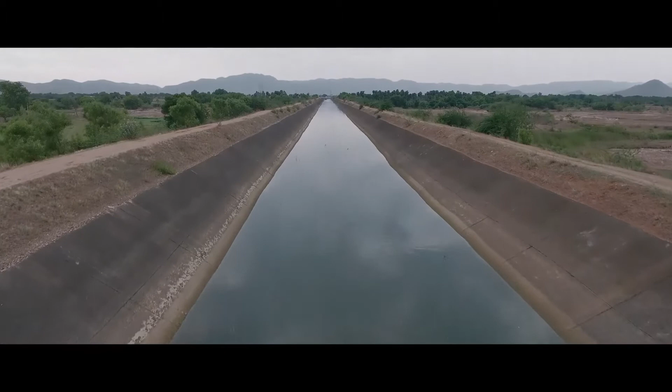The primary source of water supply for Tirupati Municipal Corporation has been Satyasai Ganga Canal, a non-perennial source which is about 43 kilometers from the foothills of Tirumala. The process through which Tirupati Municipal Corporation caters water for its people can be simplified into three parts.

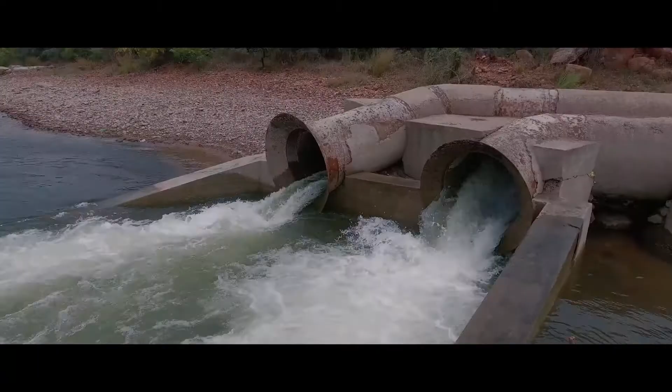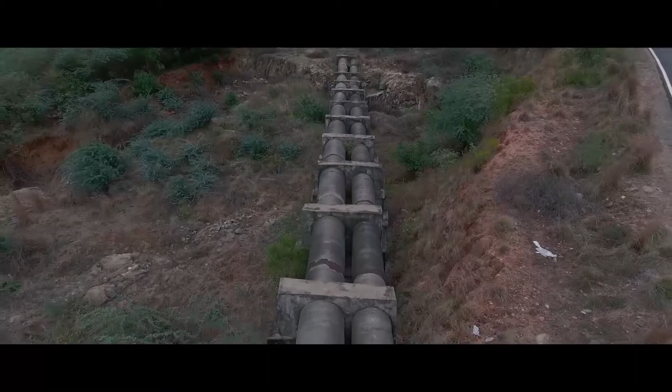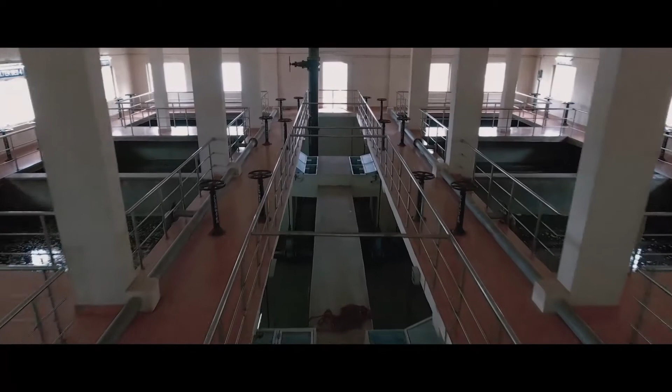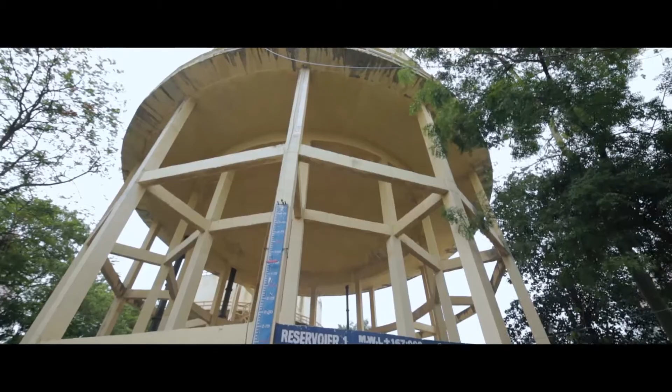Water from this canal is lifted and stored in Kailasagiri Reservoir about 2 kilometers away from Satyasai Ganga Canal, and then through a series of pumping and gravity mains, water is brought to Mangalam Water Treatment Plant, located near the foothills of Tirumala, and then bulk distribution of treated water to ground level and elevated service reservoirs within Tirupati Municipal Corporation limits, and then delivery of water from ground and elevated service reservoirs to individual consumers.

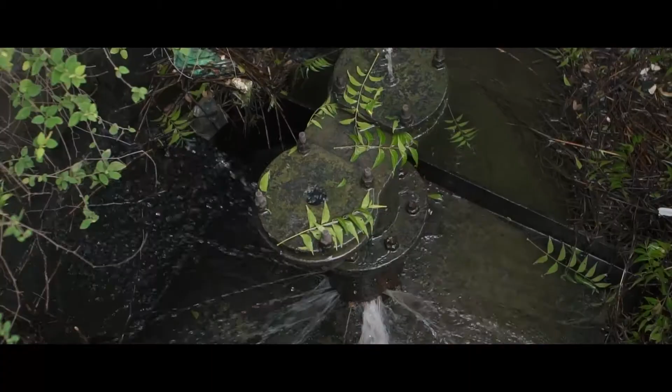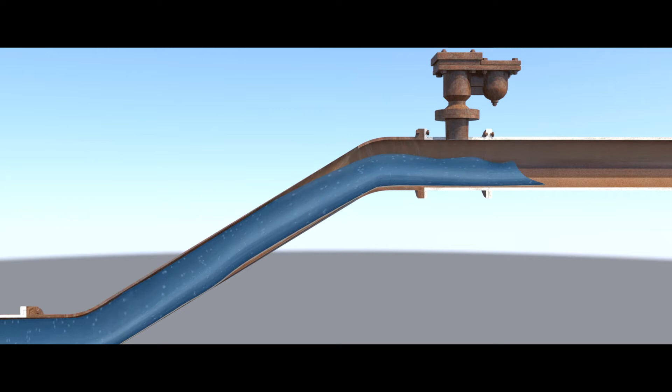This loss of capacity is affecting the drinking water needs of both Tirupati residents and also the pilgrims of Tirumala Tirupati Devasthanams. The loss of capacity in the supply of drinking water is due to many problems in the existing system and its operation. The main problems pertaining with the existing system are weakening and carrying capacity of the pipelines, frequent filling and draining of pipelines because of the disruption in service further weakens the pipelines. Moreover, accumulation of air along the pipeline reduces the pipeline carrying capacity. Loss of capacity results in increased energy costs.

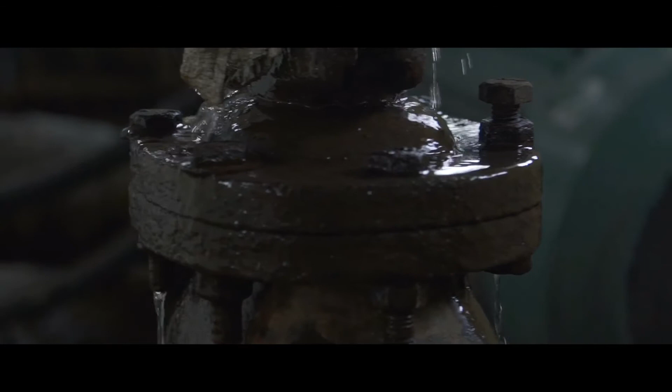Damaged check valves. Check valve may get damaged over a period of time. Once check valves stop functioning, there will be a heavy backflow through the pumps, resulting in vibration of pumps and loosening of seals and eventual leakage of water within the pump station. The damage can be huge if the operators do not react within a minute of power failure and close the valves.

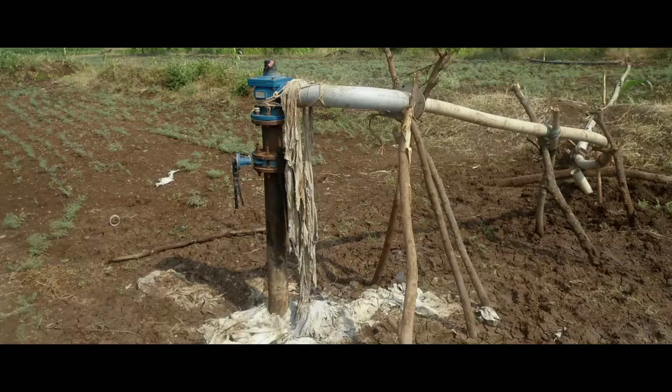Exposed air valves. The conventional air valves are exposed to people who tamper them and steal water. In this process, these valves become non-functional, which will have a negative impact on the hydraulics of the scheme. And there are problems that arise in a specific stage of water supply process.

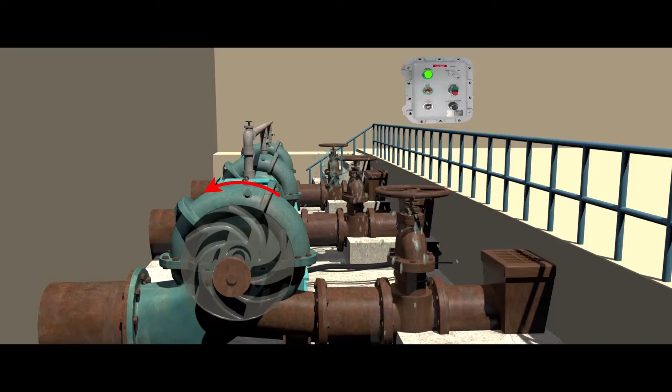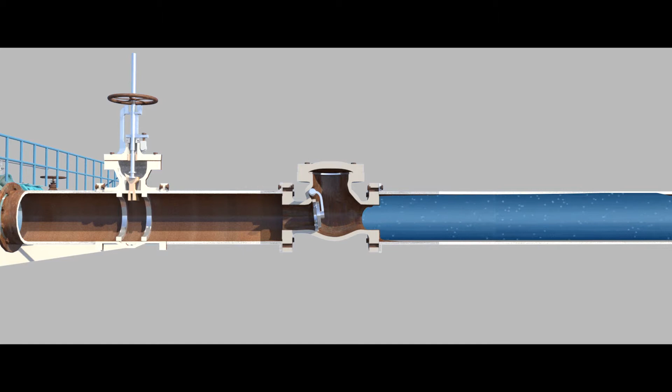Absence of an adequate surge protection system. Every time the pump trips, a water column slams on the check valves, both at the pump station as well as along the pipeline. These slam pressures can exceed pipe pressure rating, causing a burst. If there is no burst in the first instance, the repeated occurrence can progressively weaken the pipeline and result in an eventual bursting of pipeline, a fatigue failure.

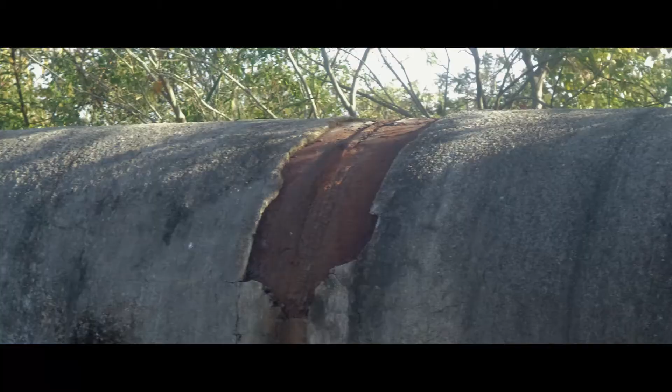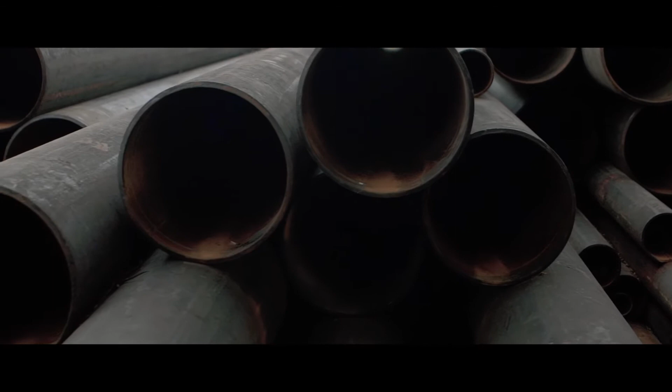Frequent pipe burst conditions. Every time a pipeline bursts or a major leakage develops, it takes anywhere from 6 hours to 1 day to fix the problem and restart the pumps, causing a disruption in treatment of water and supply of water to consumers. Time-consuming repair works. When there is a break in the pipeline, almost the entire pipeline needs to be emptied before undertaking the repair works. The draining process takes a long time and is often accompanied by loss of precious water and damages to the nearby crops.

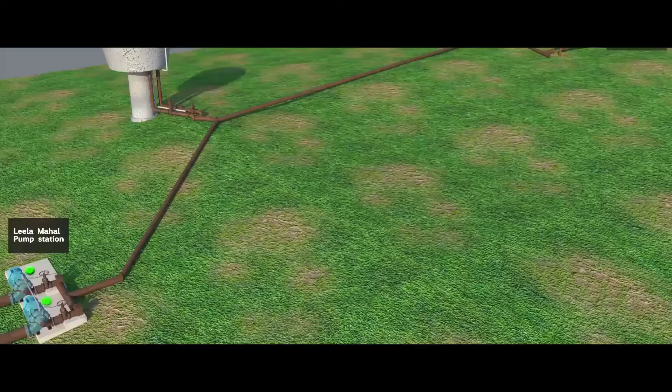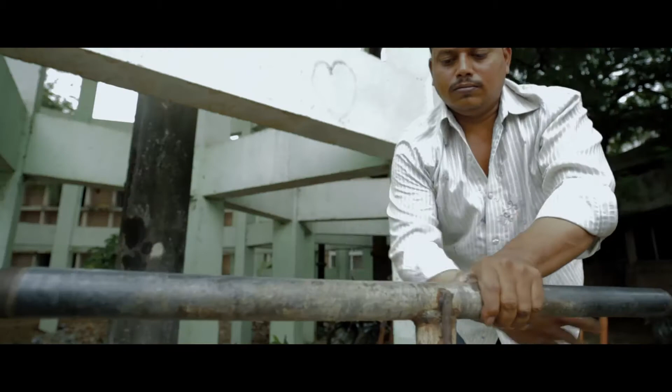In the stage of bulk distribution of treated water, achieving equitable distribution of bulk treated water to ground and elevated service reservoirs is almost impossible, and the traditional method of manual throttling is a very tedious process. No matter how well a system is designed, the inevitable variation in residual heads will distort flow of water into each reservoir, which results in inequity.

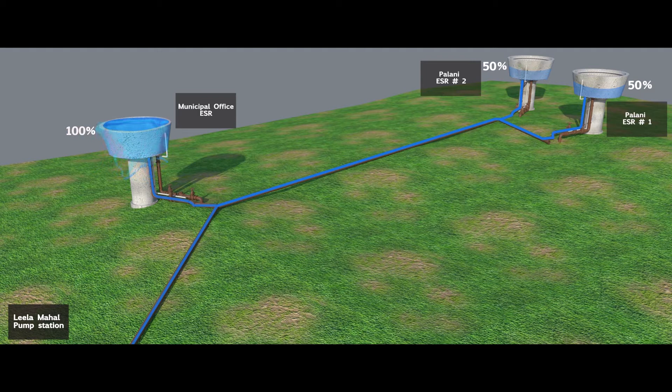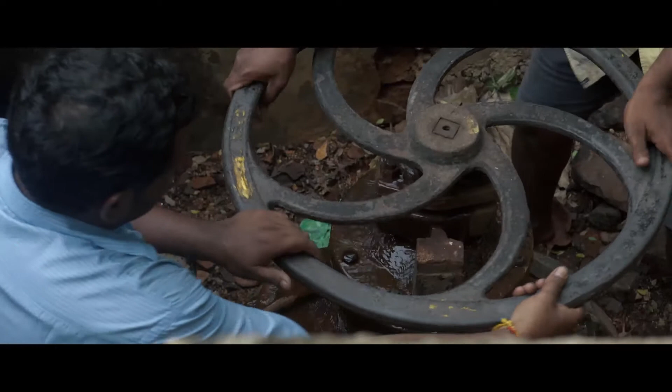In the stage of supplying water to households, once again, inequity will set in, as flow of water to various households is dictated by gravity and hydraulics. The supply process is done manually, which is also a reason for unequal distribution.

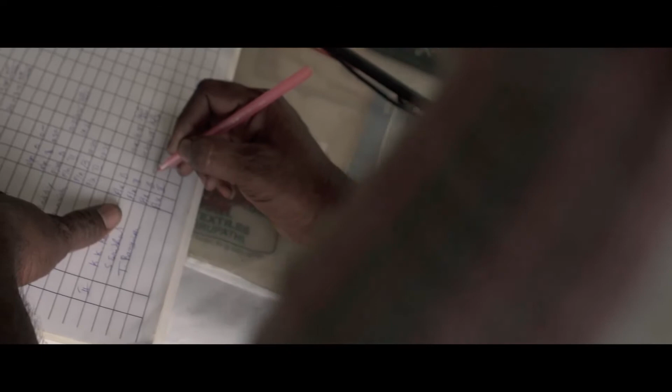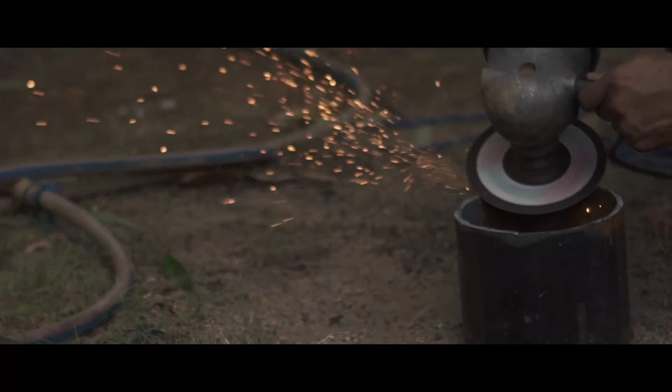Manual operation. The entire scheme is operated and managed manually by untrained manpower and hence mismanaged, leading to many failures of pumps and pipeline. Every failure requires a lot of downtime for repairs and maintenance, leading to no water supply for days. And in addition, recurring unexpected and unwanted expenses.

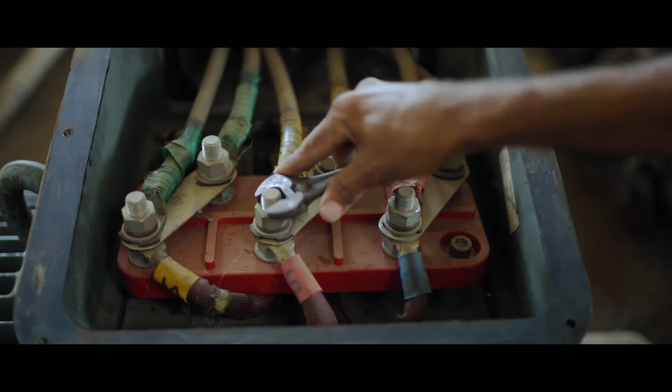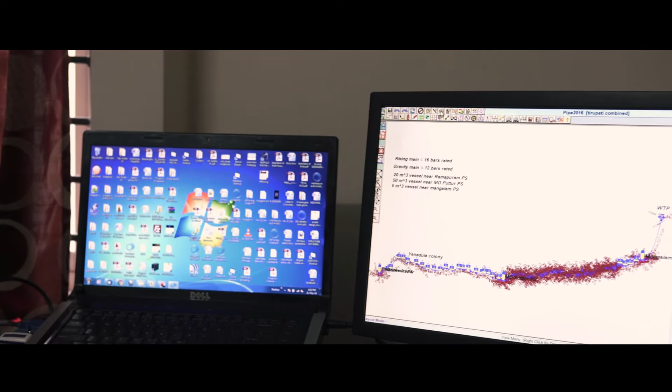To improve this critical water supply situation, the Tirupati Municipal Corporation has taken up the Tirupati repairs, renovation and rehabilitation of the existing water supply scheme through Rachna Saisanket. Saisanket are the Israeli technology integrators and smart solutions providers to water projects. This water supply scheme was analyzed by KY Pipe Software, which is developed in the US, and accordingly, the state-of-the-art smart solutions have been integrated in this prestigious project.

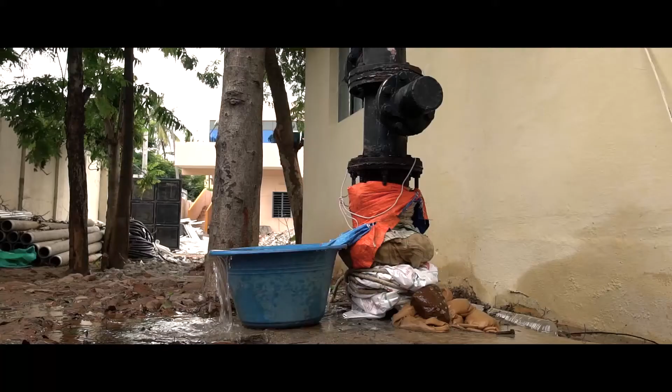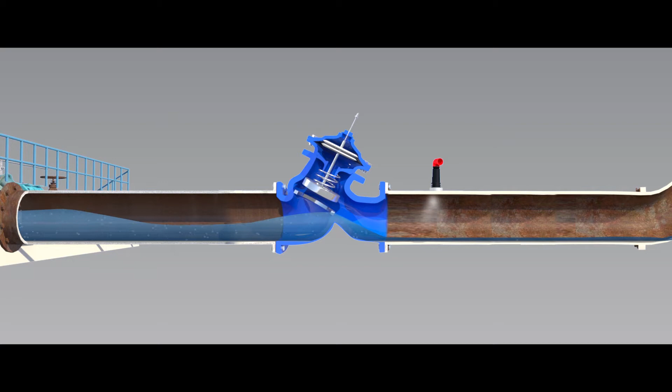The solutions to the main problems pertaining with the existing system are replacing the check valves. State-of-the-art Israeli pump control valves replace the check valves, which results in smooth starting of pumps and smooth automatic stopping of flow reversal when there is power failure, eliminating the need for the operators to run and close the valves. Since there is no slam condition, no excessive pressure generation, all equipment within the pump station and also the pipeline will be safe. No burst events.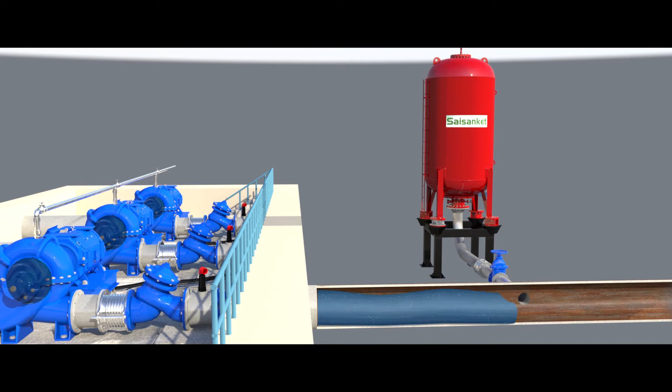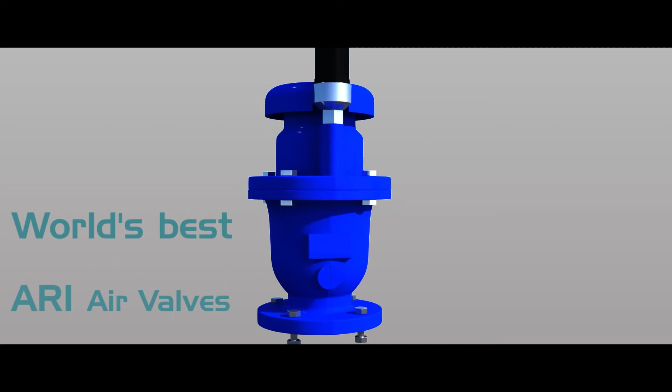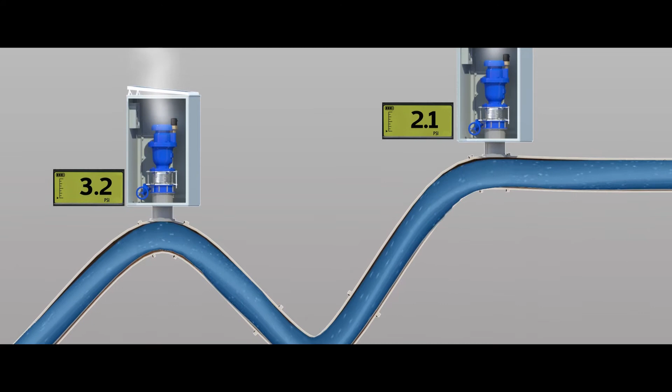Bladder vessels, maintenance-free, provide adequate surge protection system, providing a cushioning effect which limits the maximum pressures in the pipeline close to steady-state pressures. Pipeline and pumps will remain safe. Enhancing the carrying capacity of the pipeline. Usage of the world's best ARI Israeli Air Management System air valves, which releases residual air that keeps flowing into the pipeline continuously, almost 24/7, monitoring the health of each and every air valve so that preventive maintenance can be done and ensures that every air valve is in working condition.

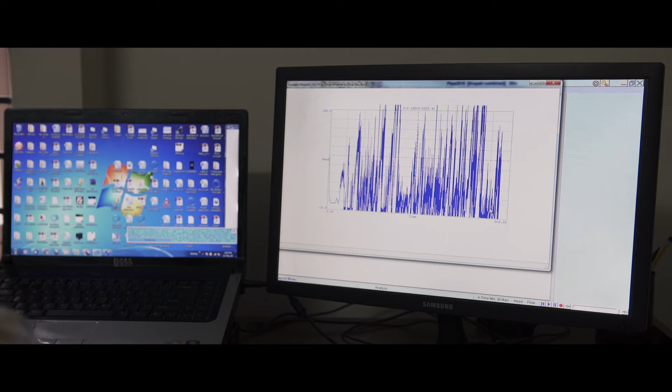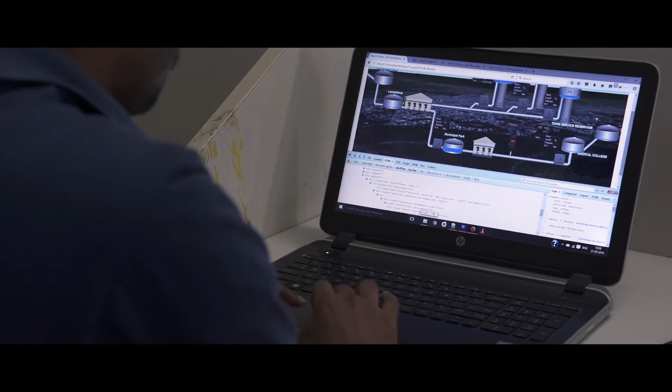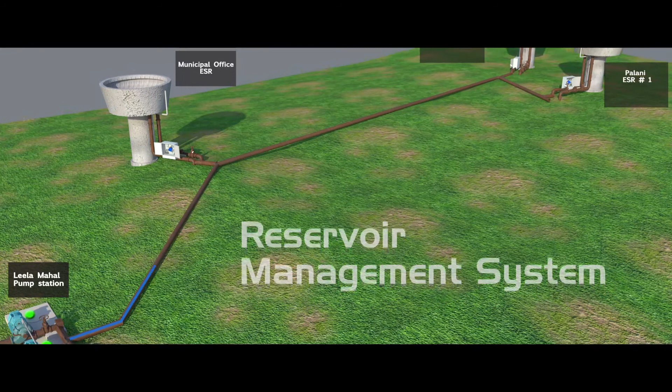Prevention of pipe burst conditions. Pressures will be monitored at each pump station using high-speed data loggers, and the data will be analyzed periodically to determine the potential surge problems and address the problems right away before they get worse and result in pipe burst conditions. Overcoming the inequity in distribution of treated water. Installing reservoir management system RMS at the inlet side of each receiving reservoir, which automatically shuts off the flow into reservoirs once a designated quantity of water is delivered to that reservoir.

And for supplying to households, usage of zonal control valves based on energy-less hydraulic solution called WDMs, which are set to deliver a certain flow rate, volume, and for a designated time period. This will facilitate a 24/7 supply over a period of time.

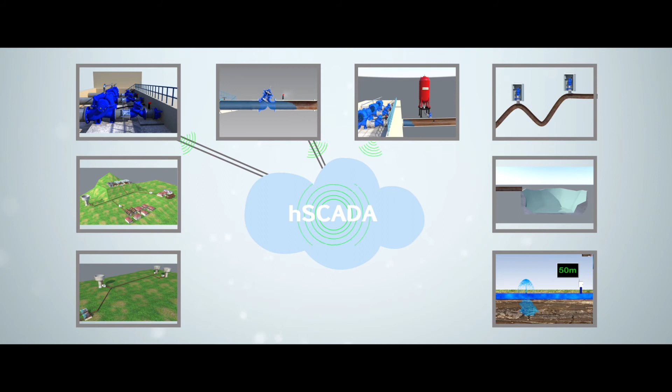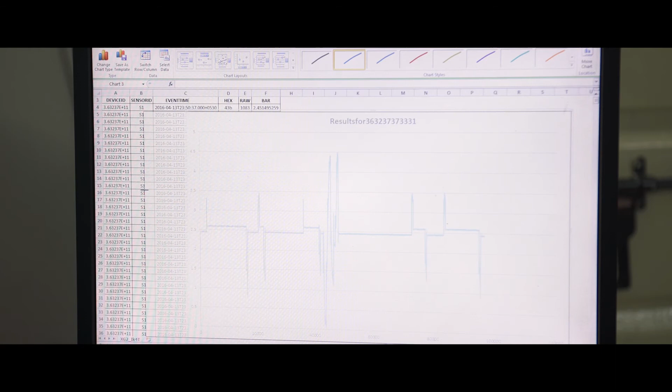Overall project control, monitor and manage. For efficient operation and maintenance, all management tools from bladder vessels to air valve system, reservoir management system, all are part of a smart network, allowing automation and monitoring through wireless, energy-less remote control. The officials will be able to see the system working on their computer through the internet or smartphone and will receive alerts, intimations, on-demand access to historical data. So, informed decisions can be taken in case of vandalism, pipe leakage, and unintended deficiencies in the system in real time.

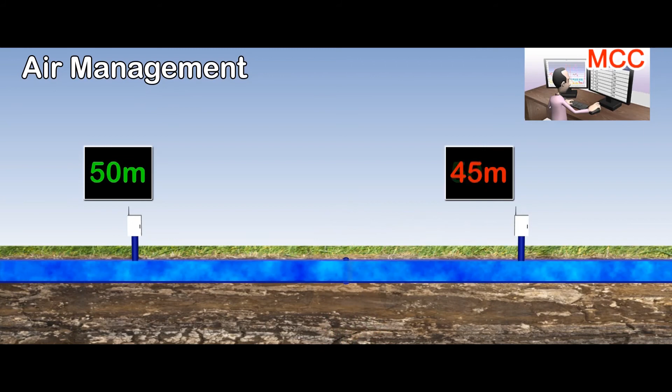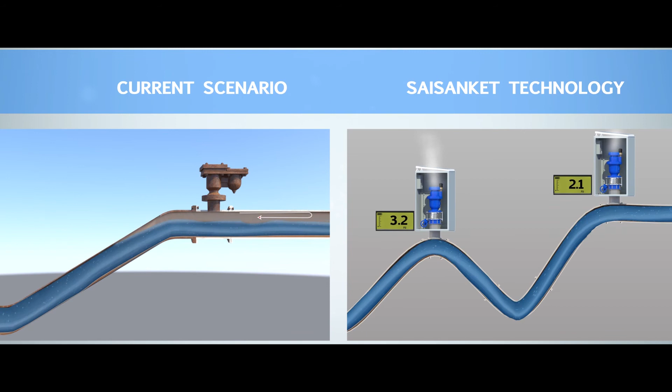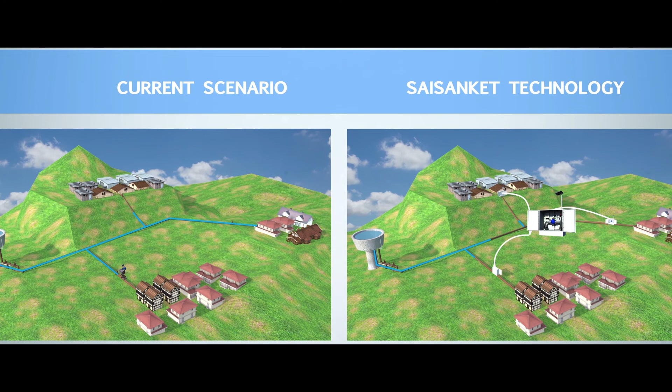The best water management practices, advanced infrastructure, and smart water systems by Saisanket in place provide a solution for long-term trouble-free operation. The post-scenario after rehabilitation will be a reliable water supply scheme that is fully automated with improved efficiency and assured water supply to the people of Tirupati on a daily basis.